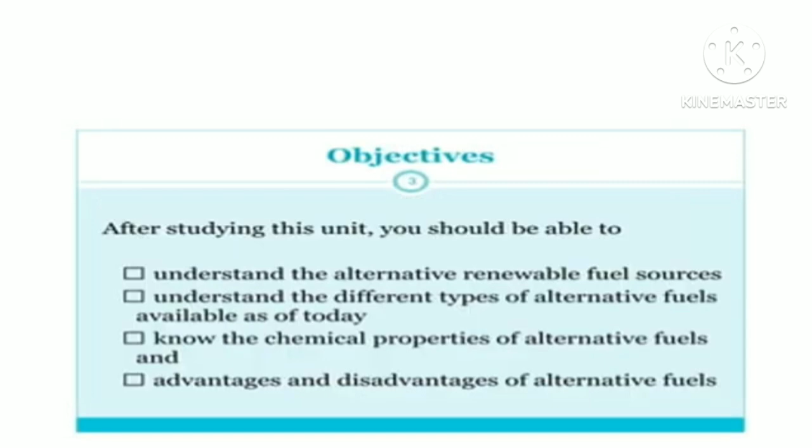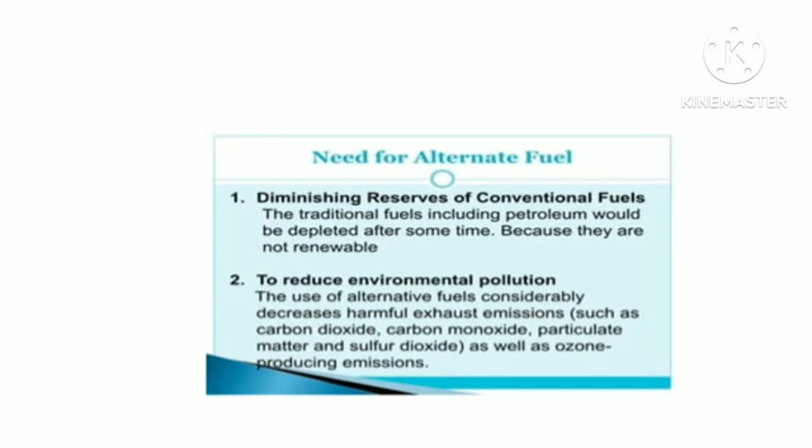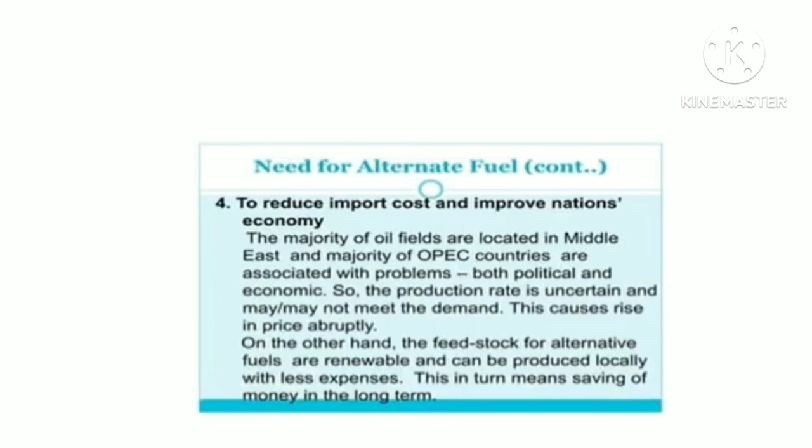This is purely based upon the necessity of why alternative fuels have become part and parcel of our lives today. In today's session, we will look at the need for these fuels and the properties associated with them.

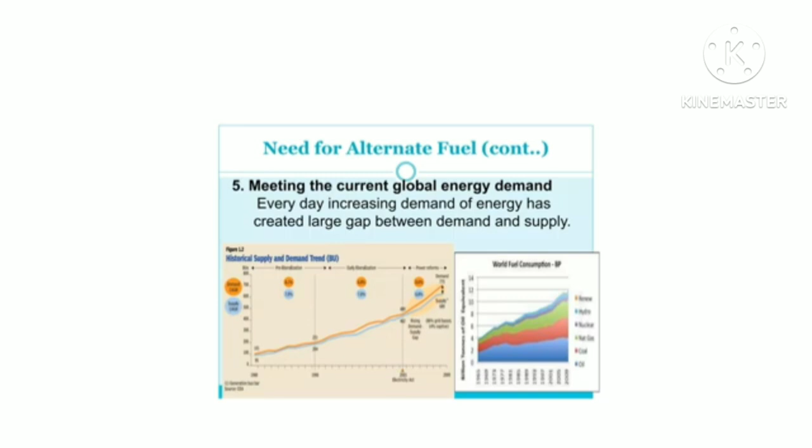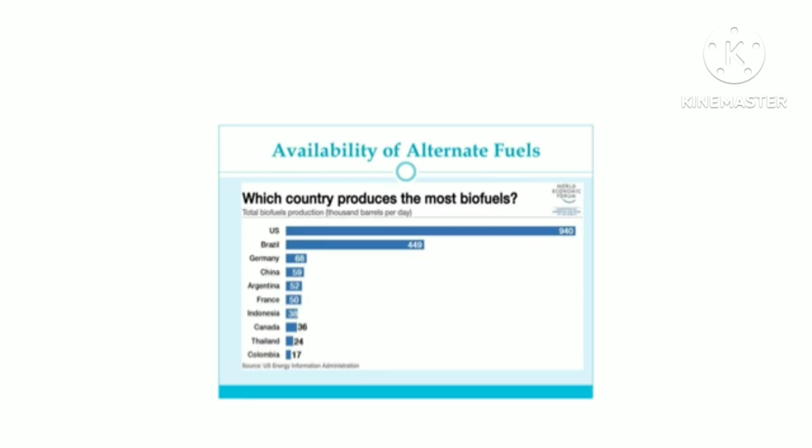The need for alternative fuels has always been on the higher side. Looking at the countries that produce the most biofuels, the US comes first with 940 thousand barrels per day, followed by Brazil, then Germany and China with 59. The key properties to consider are combustion and performance, emission, and storage and handling.

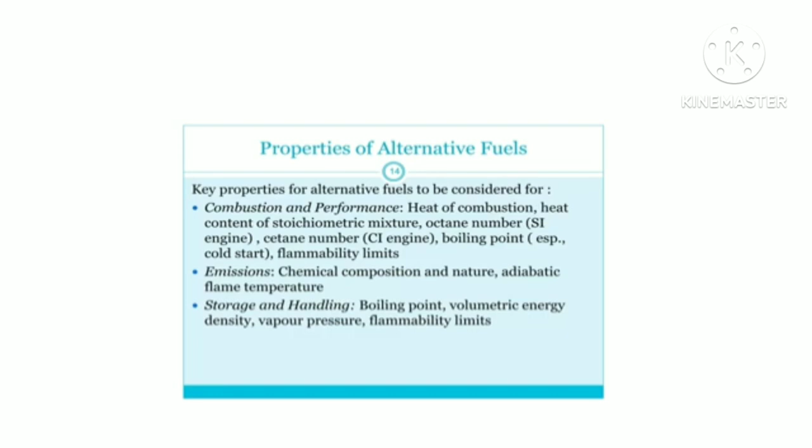Combustion is considered in terms of SI and CI engines for the stoichiometric mixture, along with storage and handling. The octane and cetane numbers also play a very vital role. In diesel engines, the cetane number has to be on the higher side, which leads to fast burning, while for petrol engines the octane number has to be on the higher side.

The octane number is the measure of performance of the fuel and predicts knocking. Based on it, and considering the ignition type, we can predict the knocking behavior. Comparing the two, the octane number is preferred for gasoline engines, while for diesel engines it is the cetane number.

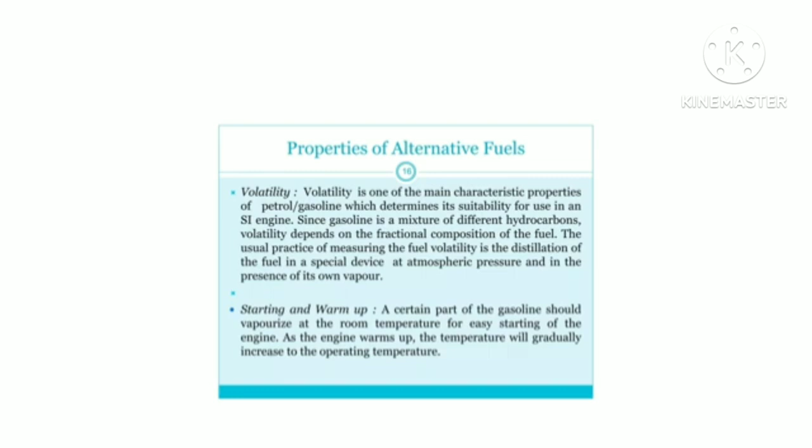Continuing with the properties, volatility is one of the main characteristics of the fuel. The substance contains a mixture of different hydrocarbons, and at atmospheric pressure this can lead to volatility.

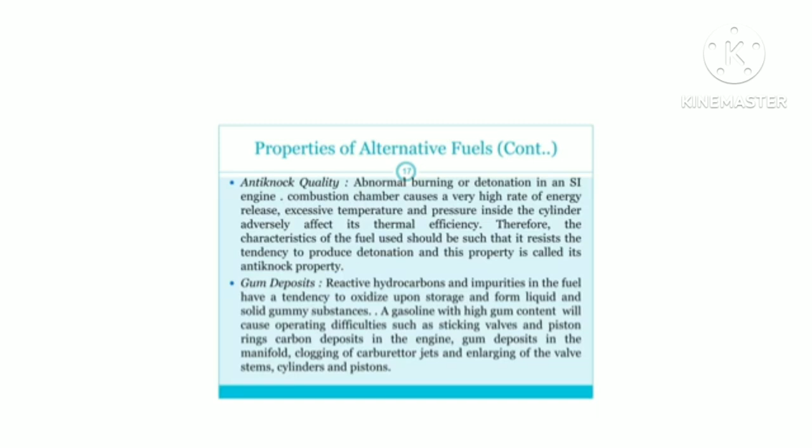The amount of sulfur content is another consideration - hydrocarbon fuel may contain free sulfur, hydrogen sulfide and other sulfur compounds, which are objectionable for several reasons, can still be present.

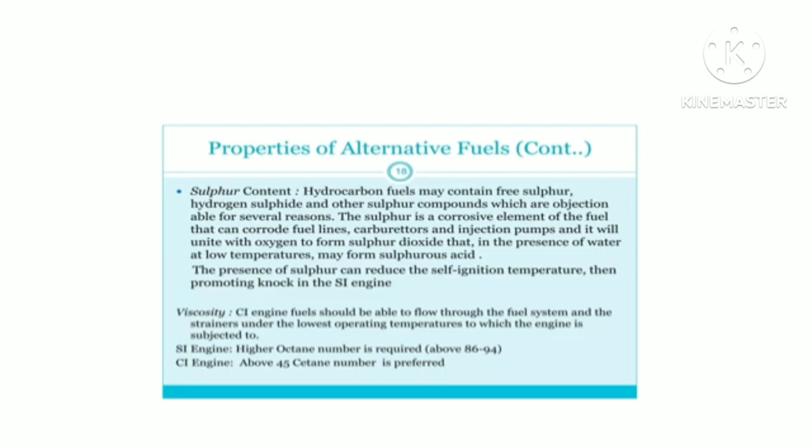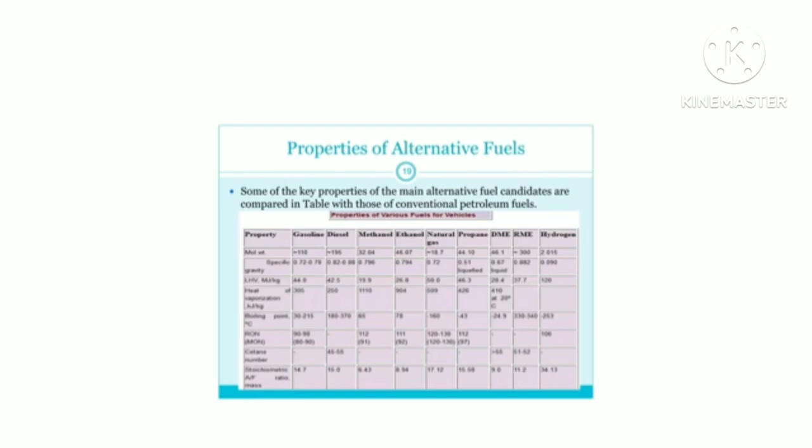Some other key properties are shown in this presentation. You can see a comparison made between the properties of a few types of fuel - methanol, ethanol, gasoline, dimethyl ether, or hydrogen fuel - showing molecular weight, boiling point, cetane number, and stoichiometric ratio.

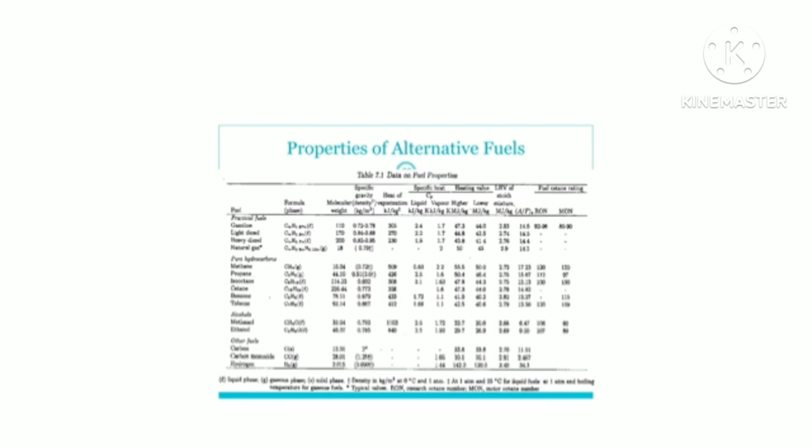Data on fuel properties for practical fuels, hydrocarbons, alcohols, and other fuel types is shown in comparison with molecular weight, specific heat, specific gravity, and heat of vaporization. Now let's look at the different types.

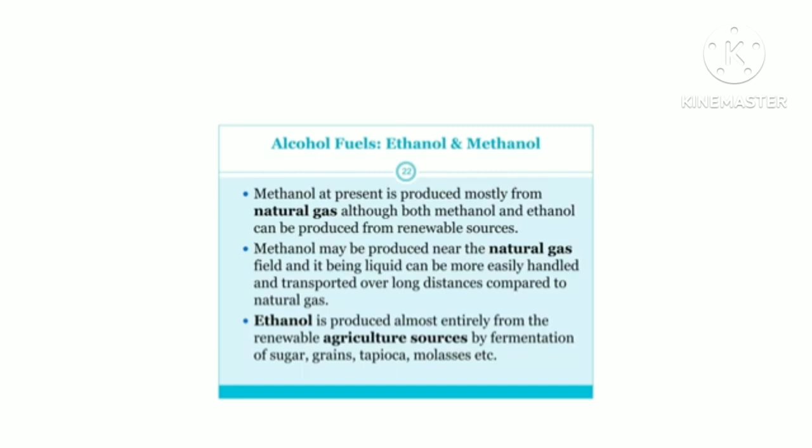The different types of alternative fuels available are shown here. We have methanol, which is one type, and ethanol as well. Methanol is a form of natural gas that has been converted into liquid.

We also have ethanol, specifically 95% neat ethanol, which is 95% ethanol and 5% water, and can be blended up to 20% in gasoline - used in Brazil and the US. We also have the use of MTBE, which is methyl tertiary-butyl ether.